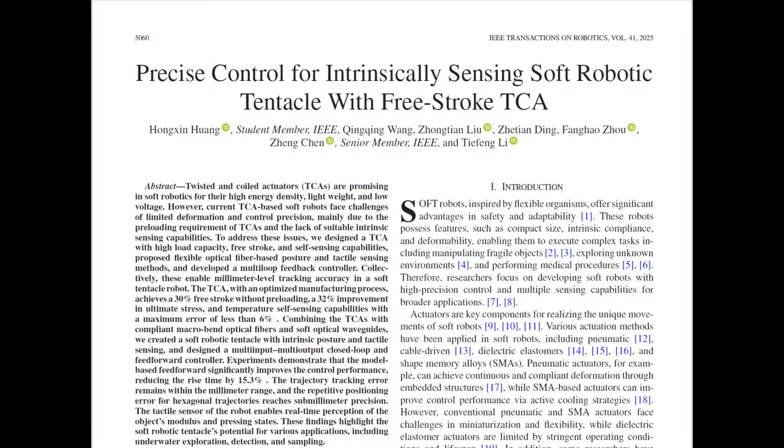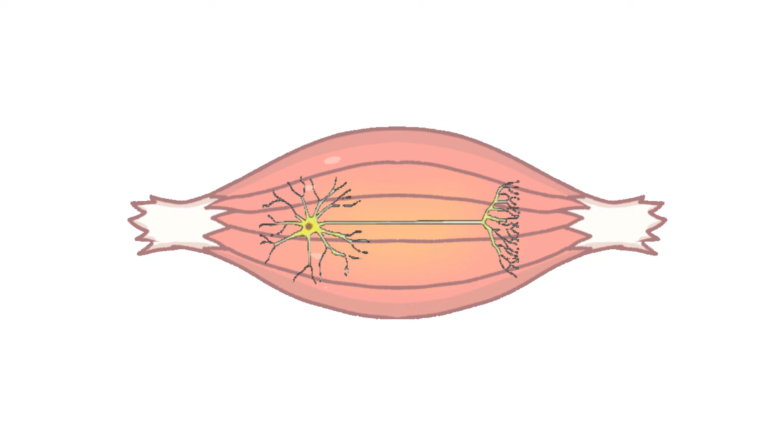5 minutes to show you a soft robotic tentacle powered by high-performance, self-sensing artificial muscles. This innovation doesn't just solve the preloading headache associated with traditional artificial muscles, it effectively implants nerves directly into them, achieving millimeter-level control precision across a wide range of motion. So, how exactly is this powerful performance achieved? Let's dive in and find out.

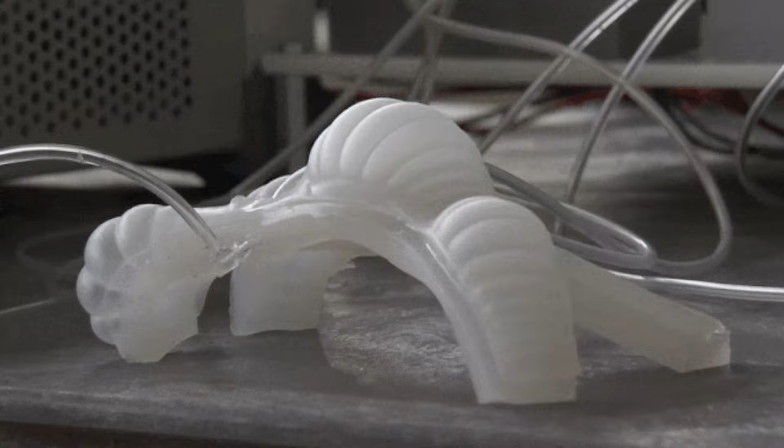Let's look at the robot's heart, its core driver, the twisted and coiled actuator, or TCA for short, commonly known as artificial muscle. If you've worked with soft robotics, you might know that while TCAs offer high energy density, they come with a major flaw. They usually require preloading. Simply put, you have to stretch them tightly before they work. This is a hassle for soft robots because that tension can deform the soft materials.

To solve this, the research team improved the manufacturing process by introducing controlled initial gaps. Think of it like leaving space in a spring, so it can contract electrically even from a completely relaxed state. No external stretching required, making it a perfect fit for soft structures. Plus, they wrapped nickel wire within the traditional nylon threads. By tracking the change in resistance of the nickel wire, the muscle can sense its own temperature with extremely low error.

To evaluate how much deformation influences the resistance compared to temperature, the researchers conducted the experiment shown in Figure A. The result is quite surprising. The resistance change caused by temperature is more than 60 times larger than the change caused by deformation. In other words, the mechanical stretching of the wire has only a minimal effect. So for this nickel wire, the contribution of deformation to resistance can essentially be ignored.

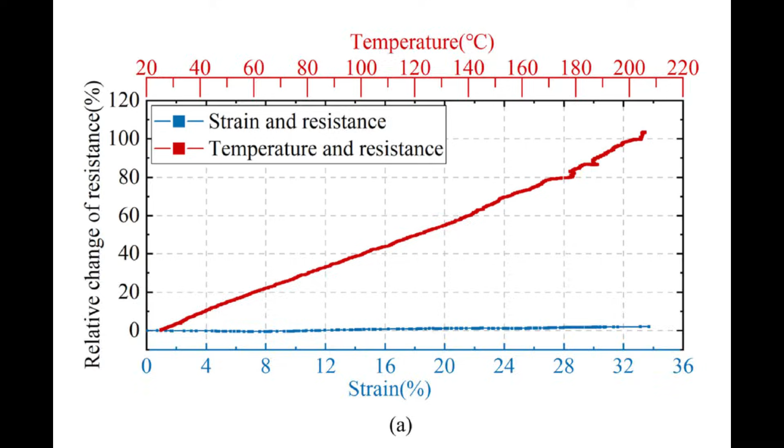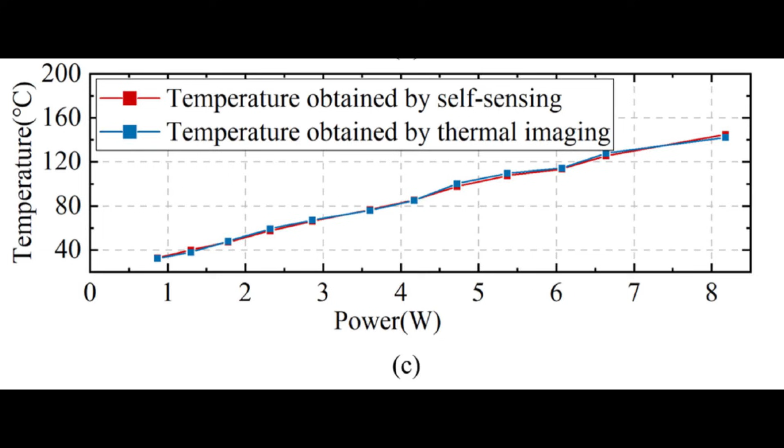By fitting the experimental data from the nickel wire's temperature resistance tests, the authors derived a clear relationship between resistance R and temperature T. They then validated this model inside an oven. Across the typical operating temperature range, the average measurement error was just 1.82%, and the maximum error stayed below 6%. It's essentially a smart muscle that is both strong and sensitive.

Now that we have powerful muscles, the next step is assembling them into an arm and giving it skin, essentially, its structural integration and sensing system. The team created a silicone soft body for the arm, with 3 TCA artificial muscles arranged at 120-degree intervals around the central axis. But how does the robot know how much it has bent while moving?

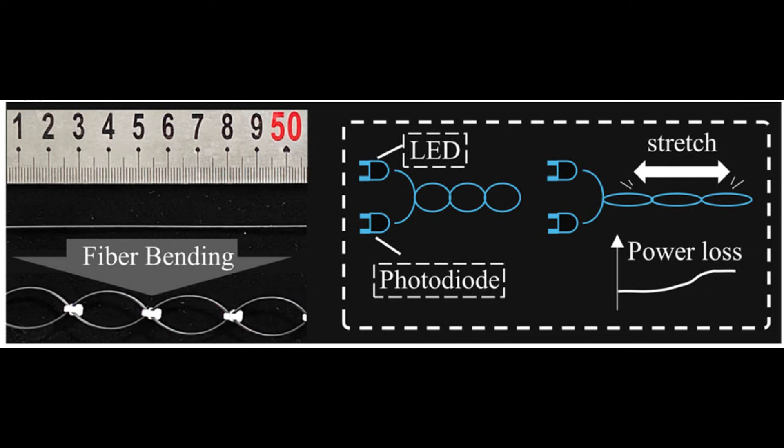It relies on optical fiber macro bend sensors embedded in the surface grooves. The principle is simple. When the fiber bends, light is lost. By measuring changes in light intensity, the system can calculate the bending angle. The team buried 3 such fibers around the tentacle, creating the robot's proprioception.

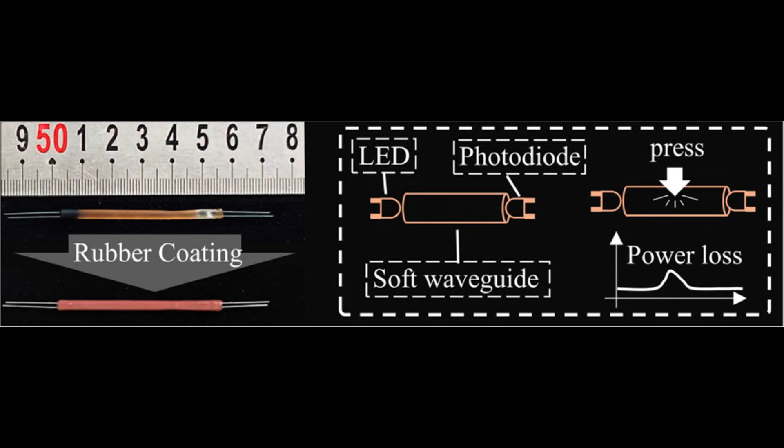Now, what about tactile sensing, the feeling of touch? They installed a stretchable optical waveguide tactile sensor at the tip of the tentacle. It's a soft cylinder where the light signal changes when pressed. This effectively gives the robot a sensitive, tactile fingertip. The hardware is ready, but here comes the biggest headache in artificial muscle-driven soft robotics. Control is difficult. This requires a smart brain.

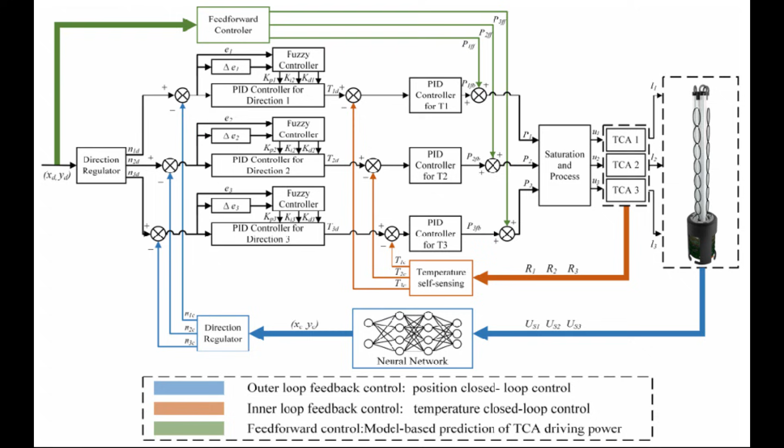The research team designed a multi-input, multi-output, MIMO, closed-loop controller to serve as that brain. This system operates on 3 layers of logic. The first layer is a neural network, which accurately translates optical signals into position coordinates. The second layer is feed-forward compensation. Think of this like anticipating where a ball will land and reaching out early. It drastically improves response speed. The third layer is PID control, used for real-time fine-tuning.

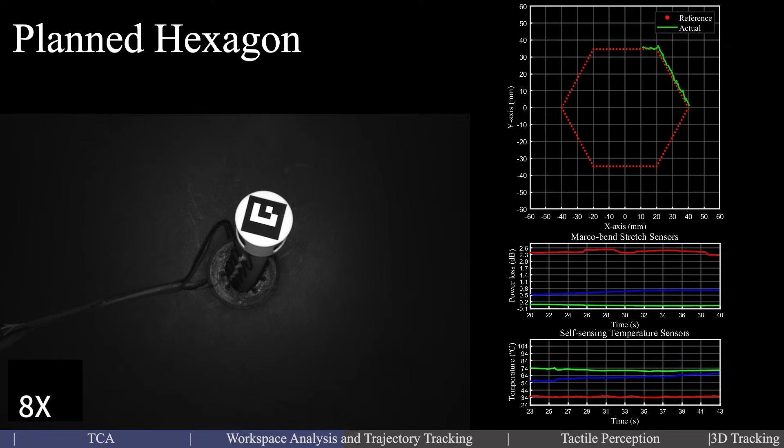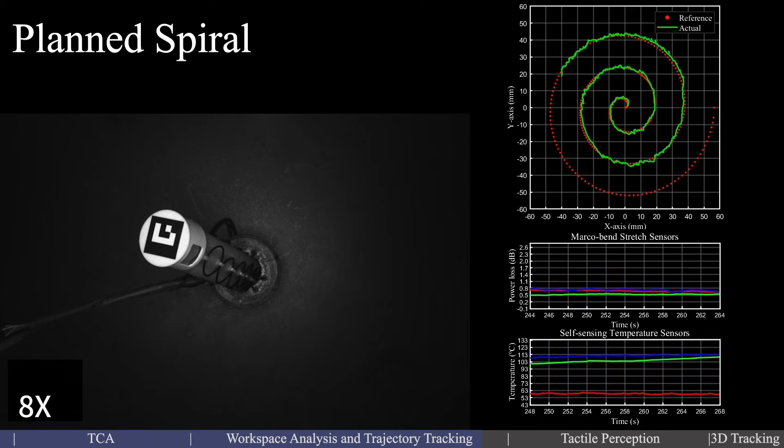Let's check out how this feeling tentacle performs in real-world tasks. First up is the drawing test, to evaluate its control precision. In the trajectory tracking experiment, this robotic arm proves to be quite the artist. Researchers tasked it with drawing circles, hexagons, and even Archimedean spirals. As you can see, whether it's a smooth circle or a sharp-cornered hexagon, it tracks the path very tightly.

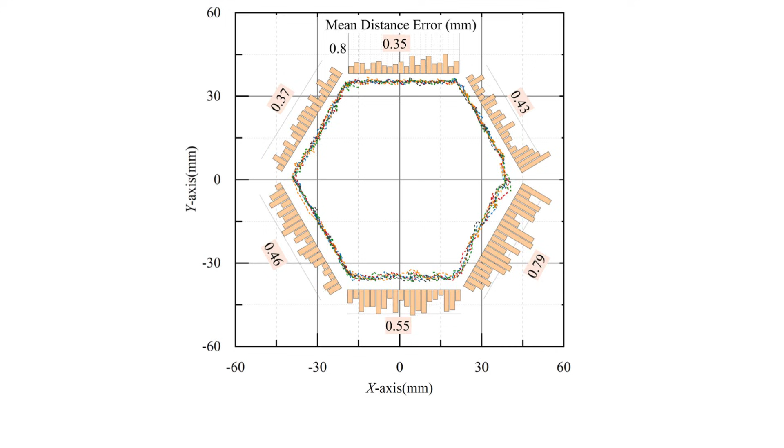Specifically, in the hexagon repeatability test, the mean absolute error was only 0.49 millimeters. For a soft robot driven by heat, that level of precision is remarkably impressive. Next is the tactile test you're likely most curious about. Does it really have skin? As we mentioned, it's equipped with an optical waveguide tactile sensor.

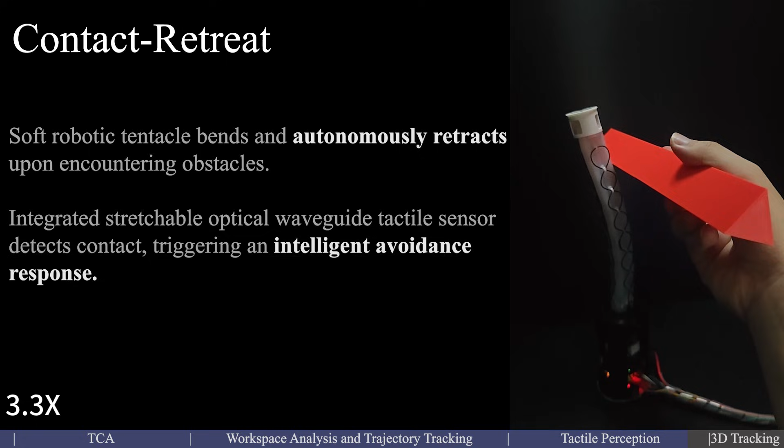In the experiment, researchers made the tentacle bend down to touch objects of different materials, such as sponges and silicone blocks of varying hardness. Through signal differences, it can accurately distinguish between soft and hard. But that's not all. It can also perform press detection and surface recognition. When you continuously press on its surface, it senses the change in force in real time.

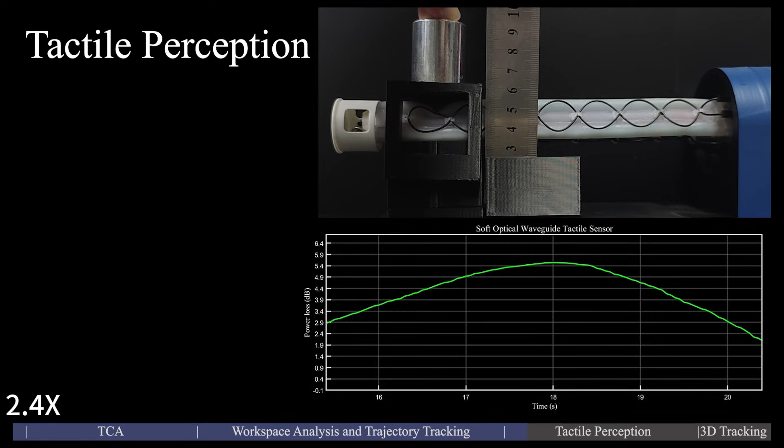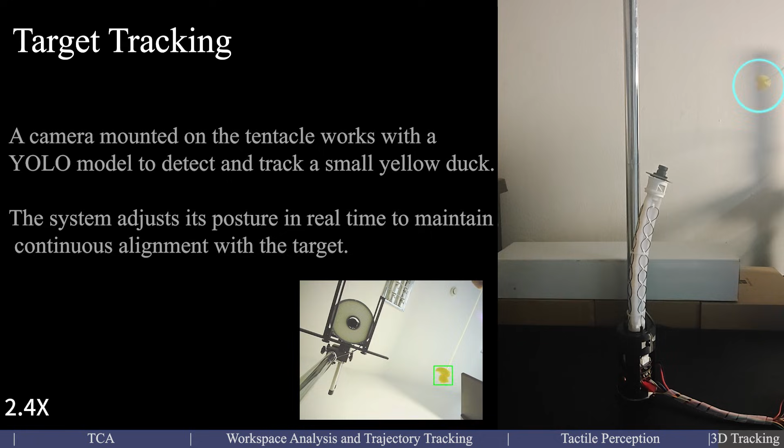When it slides across different surfaces, combined with the neural network, it can distinguish whether the road is flat or wavy. It's just like a human touching something with their eyes closed, knowing not only what it touched, but also the texture of the surface. Finally, here comes the fun part: dynamic tracking of a yellow rubber duck. They mounted a camera on the tip of the tentacle to track a moving duck.

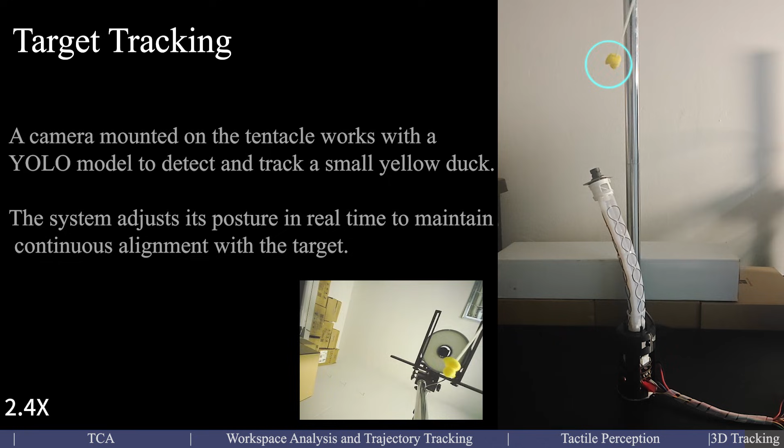You can see that no matter how the duck moves, the tentacle flexibly twists its body to keep the duck locked in the center of its field of view. This proves that it can do more than just follow a preset trajectory. It can combine vision and touch to respond to external changes in real time.

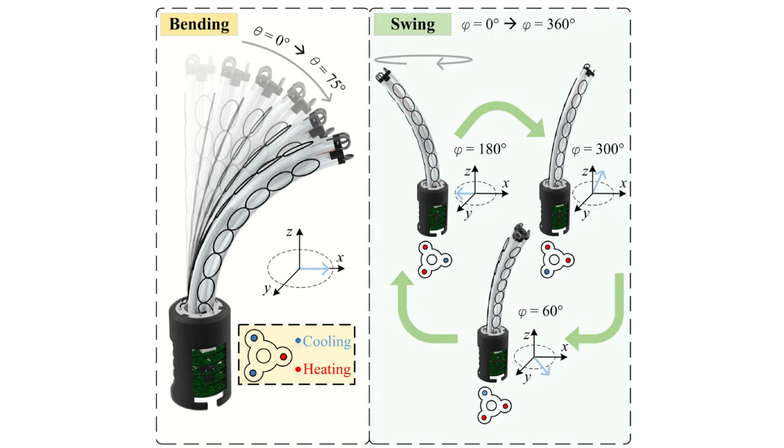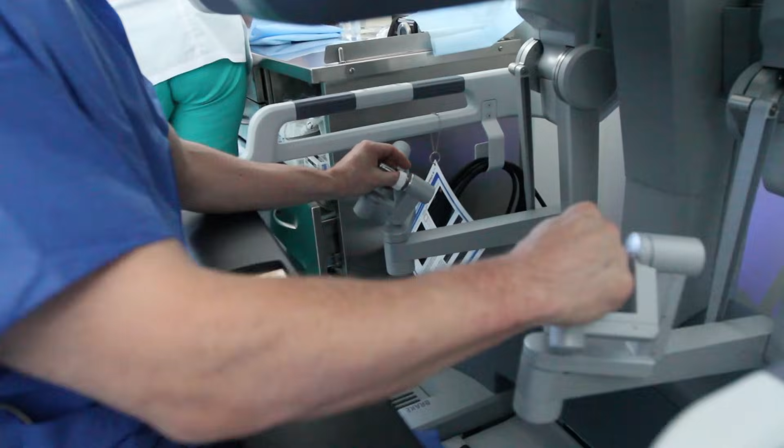Although it is currently just a single tentacle, imagine this: if we link multiple modules like this together, could we build a robotic arm that is as flexible, powerful, and precise as an octopus tentacle? This offers a very promising direction for future medical surgical robots or exploration in complex environments.